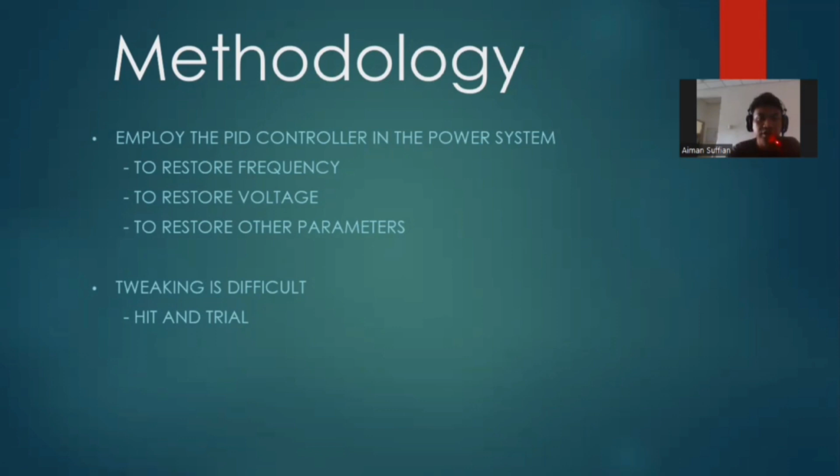So we use the MATLAB Simulink model because the recent version of the MATLAB software has included the PID tuner, which only requires that we input the response of any Simulink model, and it will instantly return results within a brief period of time.

So in order to create an open loop and closed loop system, we first need to add the second order transfer function to the model in the MATLAB Simulink software. For P, PI, and PID controllers, as well as the open loop model system, a different transfer function was applied for each model.

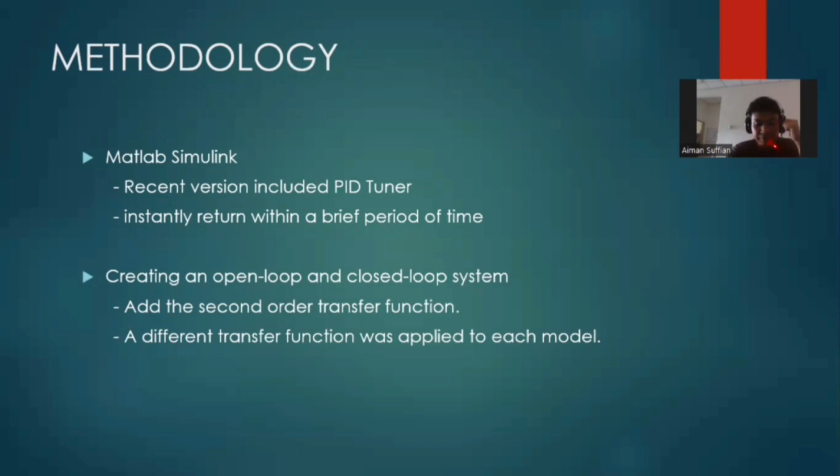Then we just open the dashboard to bring up the blank window which functions as a scope and displays the graph without opening the scope.

After we run the simulation, the graph displayed a significant overshoot and a very long settling period. Then we just need to tune it precisely using the PID tuner to eliminate the overshoot and achieve a brief settling period.

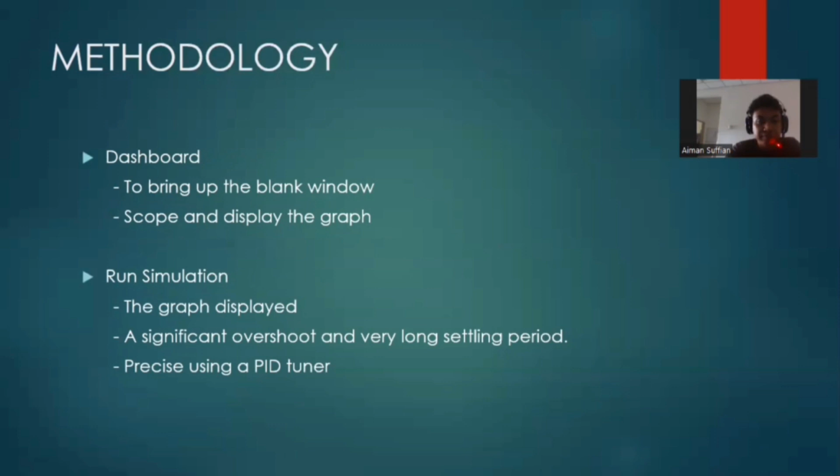To launch the PID tuner, we need to click the button on the PID controller block. The PID tuner will launch and transmit the graph there, instantly creating a tuned control response for the graph. The new parameter value is displayed in the controller parameters, showing several block and tune response parameters so that the results can be compared.

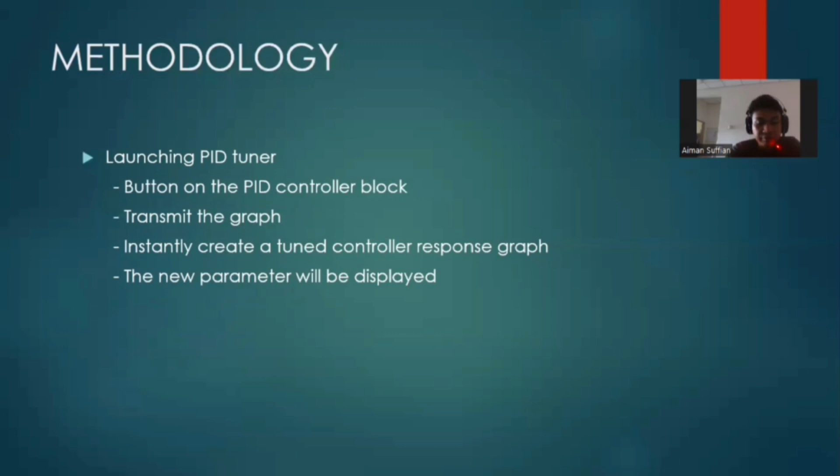So after the simulation, once the PID controller produces a satisfactory outcome, the next part is to design an open loop system using a different transfer function. The open loop system does not require the PID tuner because it serves as a direct transfer function, giving the user the desired graph right away.

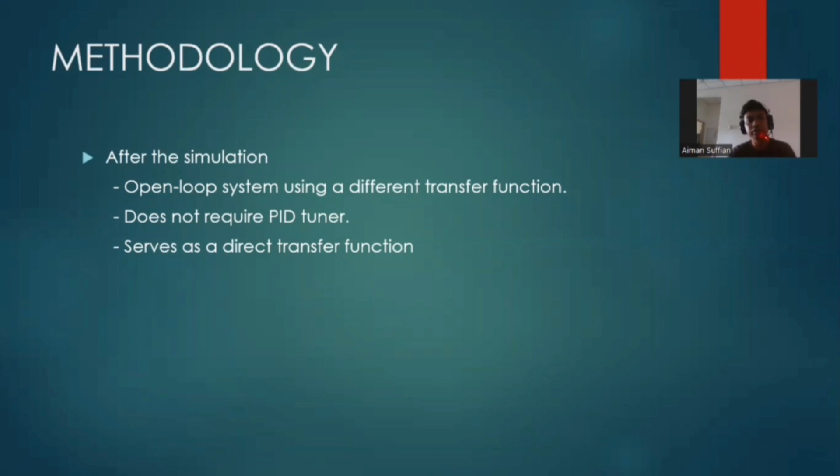Based on the instruction, we have to design a P, PI, and PID controller for a closed loop system with appropriate system requirements for transient response by tuning the controller using Simulink. A proportional integral derivative, or PID controller, is a control loop mechanism employing feedback that is widely used in industrial control systems and a variety of other applications requiring continuously modulated control.

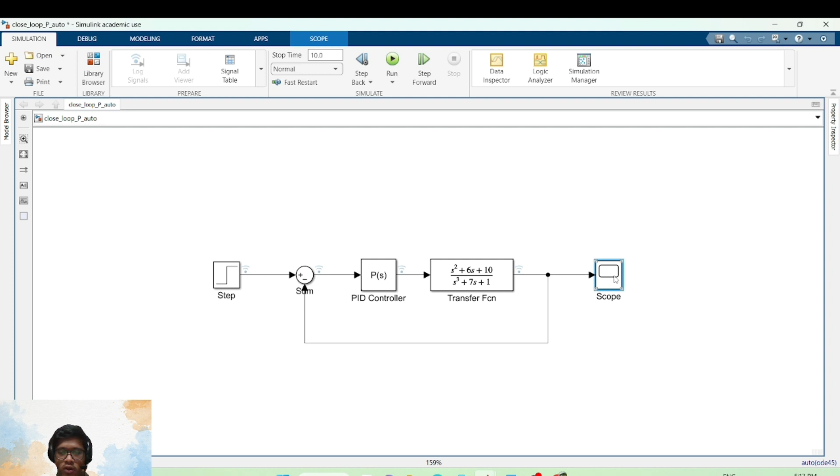So first of all, this is the circuit that we produced using Simulink. The components that we use are step, sum, PID controller, transfer function, and scope to produce a graph. This is the manual tuning simulation that we produced using MATLAB. So first of all, we have to run the simulation.

So the circuit has simulated. After that, we have to click scope to produce a graph.

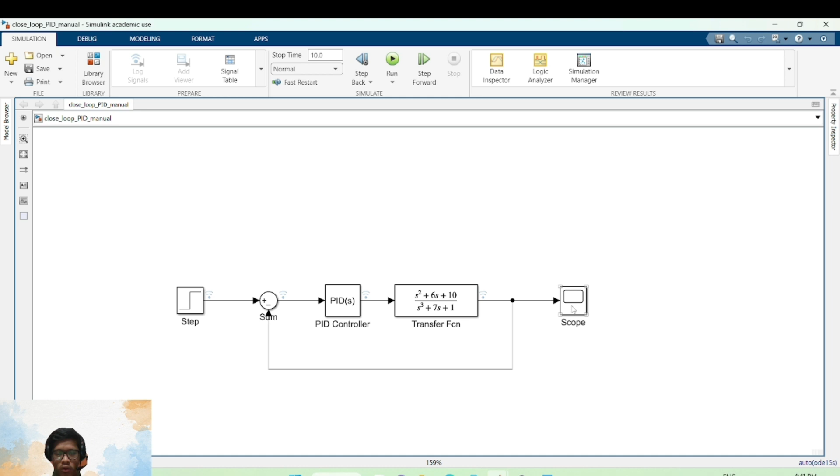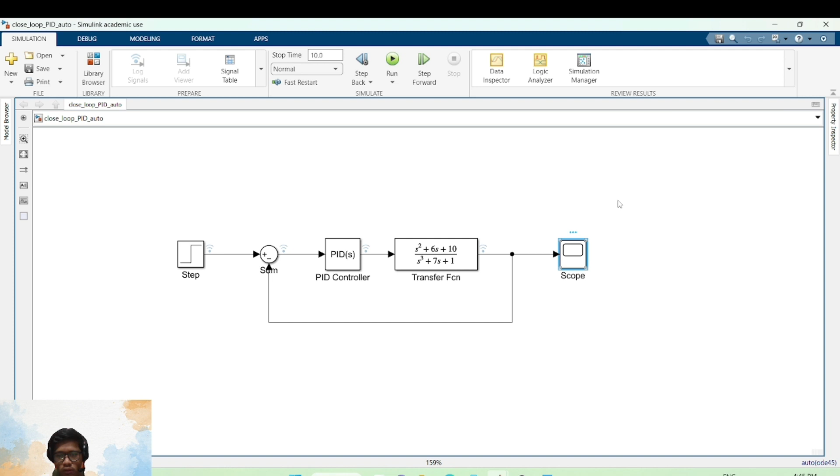And then for the auto tune, so this is the auto tune circuit. We have to run the simulation. Click scope. So this is the graph for the auto tune circuit.

Just the same as the previous procedure, you have to click the cursor measurement to find the value for rise time, overshoot and peak, on signal statistic and bilevel measurement. So you can see the value for the peak, rise time and overshoot.

So this is the result that we get for the auto tune: the rise time is 0.031006 second, and the settling time is 0.243 second, and the overshoot is 17.059%, and the peak is 1.168.

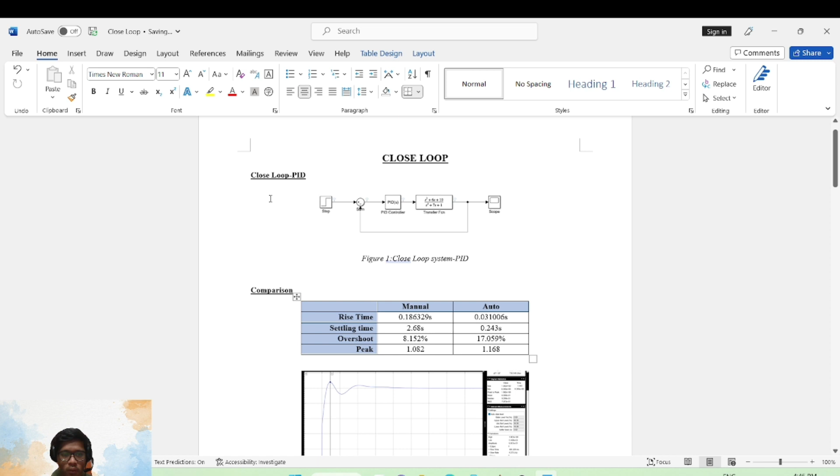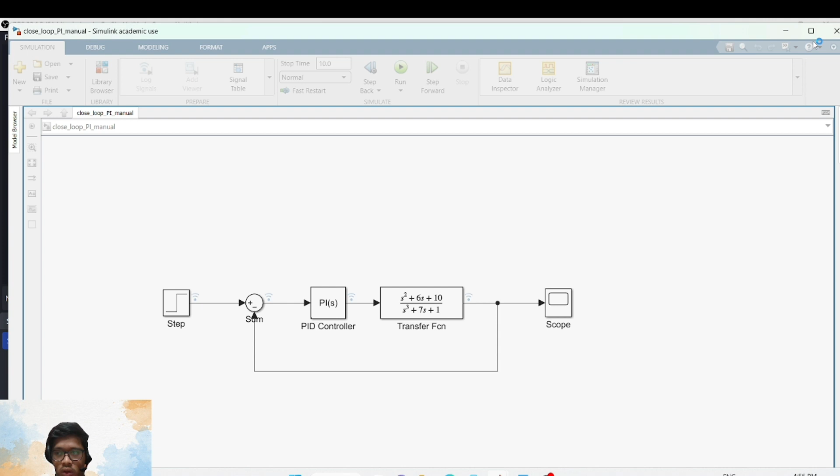So that's it for the closed loop PID. Next is closed loop PI manual tuning. So this is the closed loop PI manual tuning. First of all, we have to run the simulation. So the circuit has simulated, and then you have to click scope to find a graph.

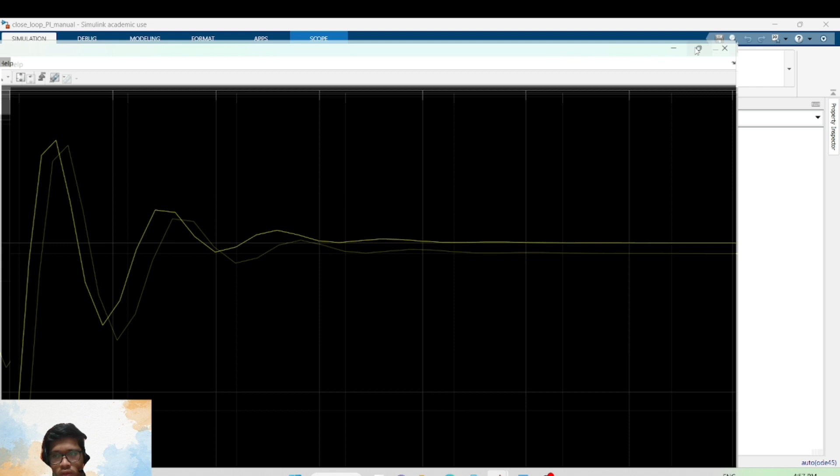So this is the graph for the manual tuning. And then you have to click the cursor measurement. So plot the cursor at the high value of the graph. So measurement, signal statistic, measurement, bilevel measurement.

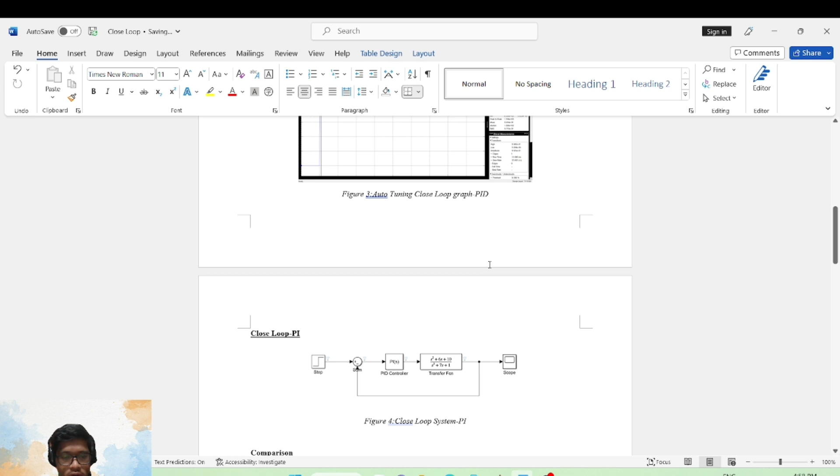So you can see the value for the peak, rise time, and overshoot. So this is the result that we get for the closed loop PI for the manual tuning. The rise time we get is 0.16112 second. The settle time is 2.87 second. For the overshoot is 34.459%, and for the peak is 1.346.

So the next is for the auto-tune. So this is the circuit for the auto-tune. Firstly you have to run the simulation. So the circuit has simulated. You have to click scope to find graph.

Click cursor. Measurement, signal statistic. So based on the graph, you can see the value for the peak, rise time, and overshoot.

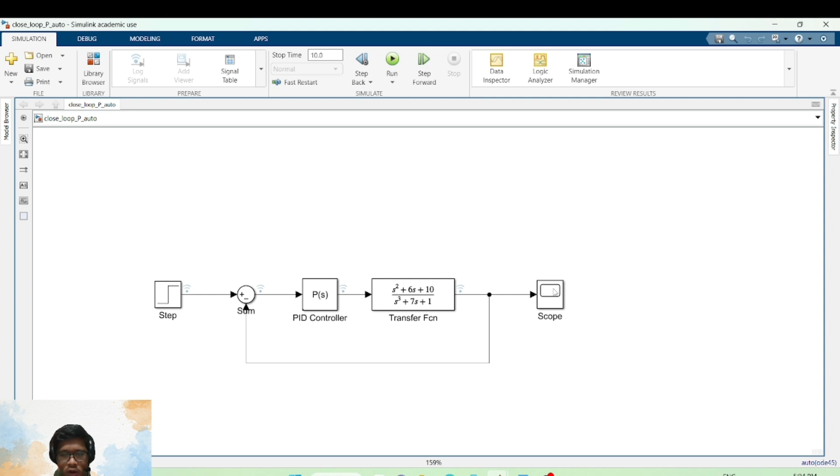So the next is auto tune. So this is the circuit for the P auto tune. You have to run the simulation. So the circuit simulates and then click scope. Cursor measurement.

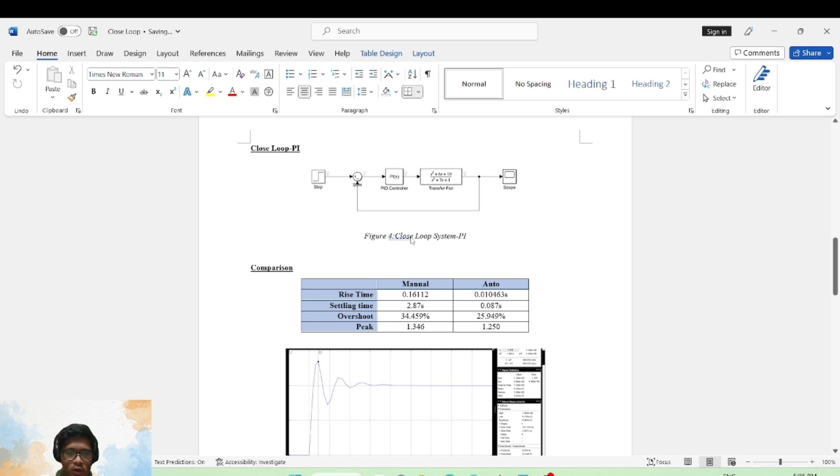So this is the value for the peak and the value for the rise time and the value for the overshoot. So the result that we get from the circuit for the P, for the closed loop P...

For the rise time on the manual tune is 0.173295 second, and for the settling time is 2.35 second, and for the overshoot is 25.945%, and for the peak is 1.241, and for the auto tune, the rise time is 0.112871 second. For the settling time is 1.23 second, for the overshoot is 21.341%, and for the peak is 1.200.

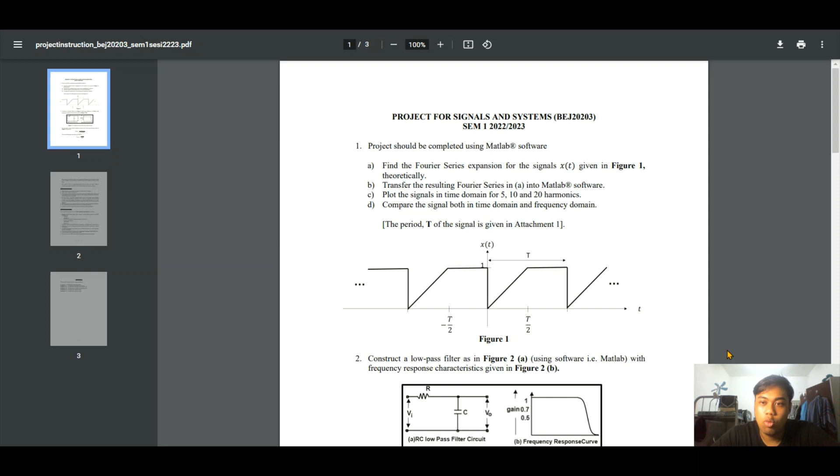Firstly, for question 1, we need to declare syms t n. Then we need to declare the frequency of our group, which is 140 kHz. Next, we need to declare the period, which is 1 over frequency, and declare the A0, which is 1 over 2.

Next, we have to declare the An, that we got 1 over pi squared times n squared times negative 1 to the power n minus 1. Furthermore, we need to declare the Bn, and the Bn we got negative 1 over pi n.

Lastly, we need to show the time interval, which is t equals 0 to 0.000001 to 20 exponent 10 minus 5. So we need to run, and we got the simulation.

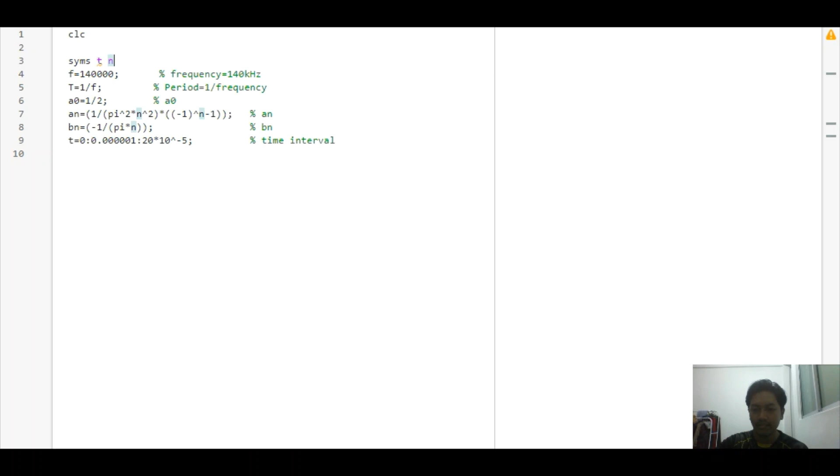Now for the harmonic plot. Firstly, we need to put the frequency, which is 140 kilohertz, and the period, which is 1 over frequency. We declare the A0, An, Bn, and time interval. Next, we need to declare the time domain for harmonic 5, and we got the simulation, the coding with the plot of t and xt1 and subplot of 3, 1 and 1.

Now for the time domain for harmonic 10. For the harmonic 10, we assume the value of R 100 ohm, and the value of C calculated manually in F, which is 2.842 exponent negative 9, and the impulse response of the low pass filter. Now we are using the Bode plot for the low pass filter. This is the coding for the harmonic 10.

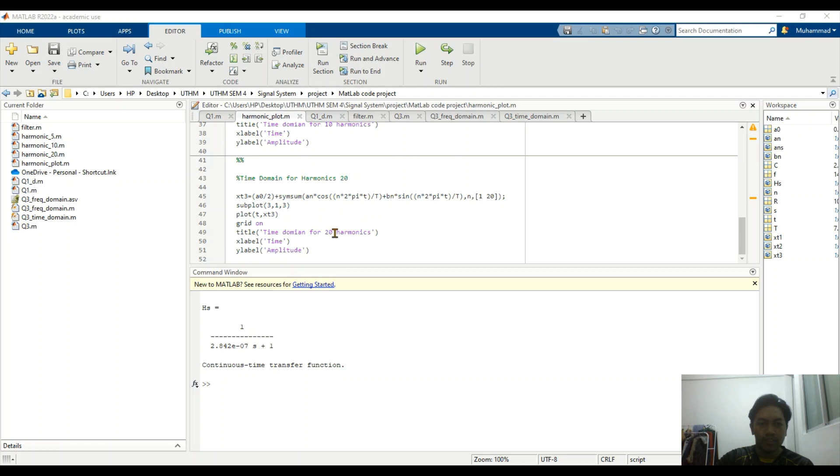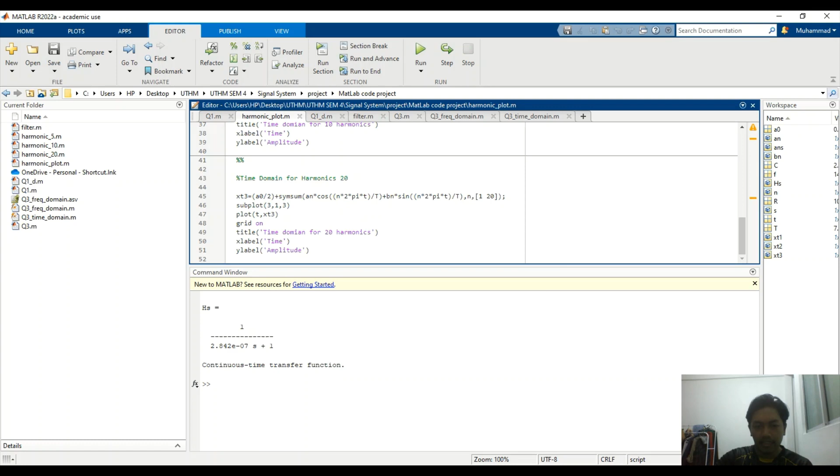As for the time domain for harmonic 20, we just do the same thing, just change the domain for 20 harmonics, and then we run. We got the H(s), which is 1 over 2.842 exponent negative 7 s plus 1, and this is the figure for the amplitude time domain for 5 harmonics, time domain for 10 harmonics, and time domain for 20 harmonics.

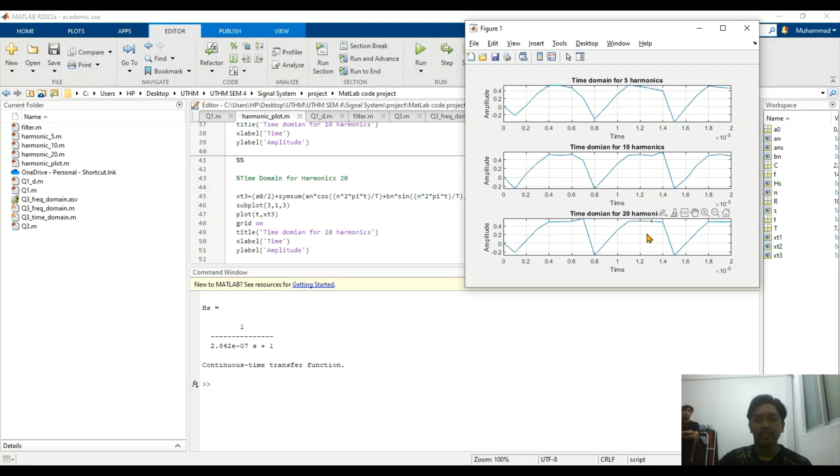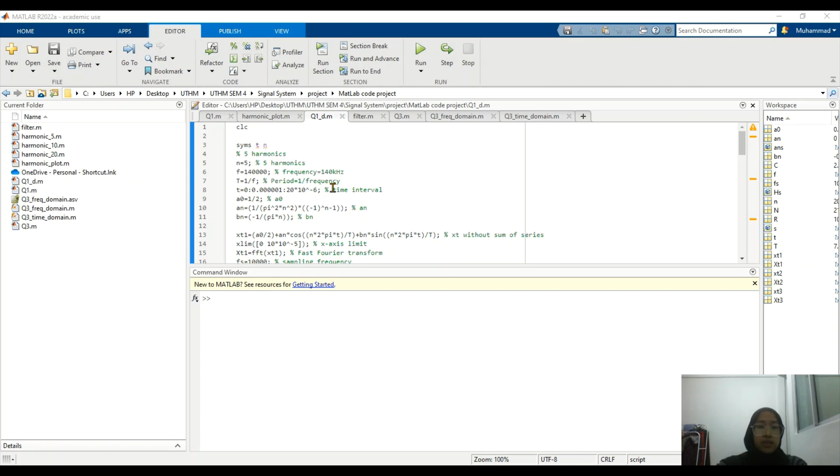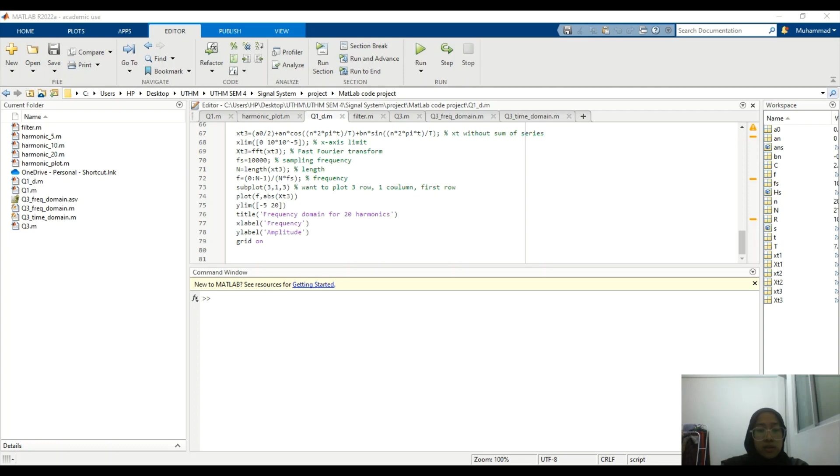Okay, my name is Nur Fasha binti Muhammad Rashid. I will present for the frequency domain. Okay, this is coding for 5 harmonics of a frequency domain. This is coding for frequency domain 10 harmonics, and this is frequency domain for 20 harmonics. This is our result. Thank you.

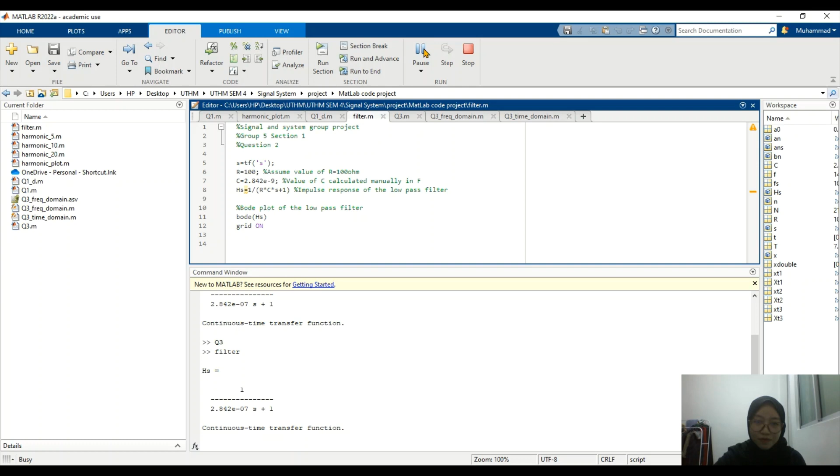Hi, Assalamualaikum. My name is Nadira Adiba binti Jusuf. So this is the coding for the filter from question 2. So we assume the value of R is equal to 100 ohm. Then we run the simulation. This is the result for the filter.

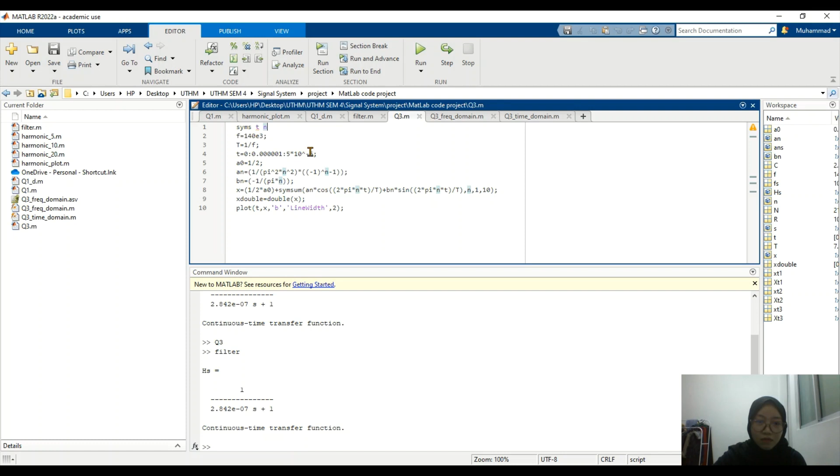Next, for question 3, this is the coding, in which our group frequency was 140 kilohertz. Then we run the simulation. This is the result for question 3. Thank you.

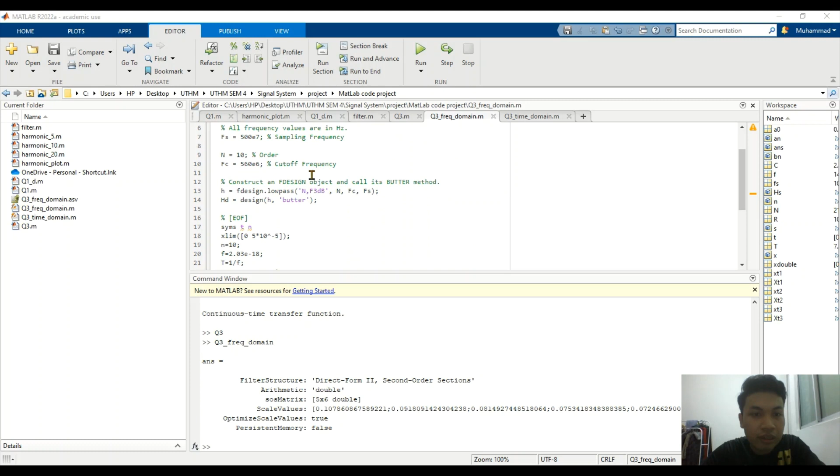Assalamualaikum warahmatullahi wabarakatuh. My name is Muhammad Aiman Muhammad Sufian, and this is question 3 for frequency domain. So this is the coding. Fs is equal to 500 exponent 7, n equals 10, Fc equals 560 exponent 6, and then this is the coding, and then we just click the simulation button, and this is the result. Thank you.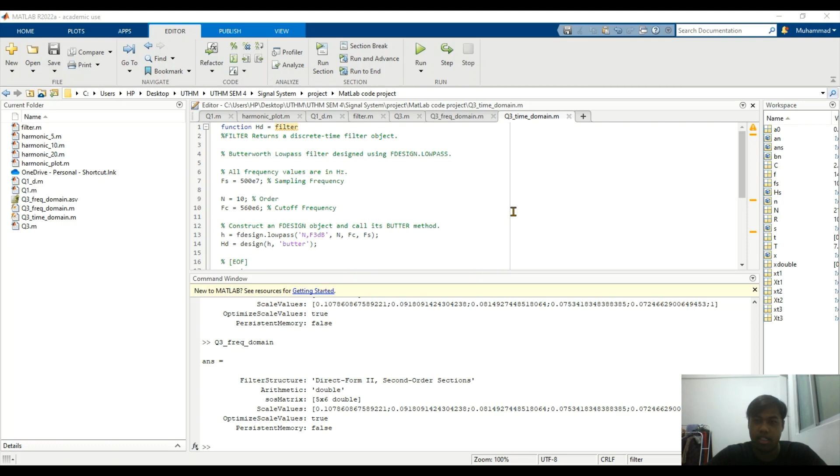Assalamualaikum warahmatullahi wabarakatuh. My name is Muhammad Darush bin Mutawaddin, and my matric number is DE 2036. So this is the coding for question 3 time domain. So we can see this is the filter returning a discrete-time filter object, Butterworth low pass filter designed using FDESIGN.LOWPASS, and all of the frequency values are in hertz, and this constructs an FDESIGN object and calls its BUTTER method, and this is the EOF. This is the coding. So let's run.

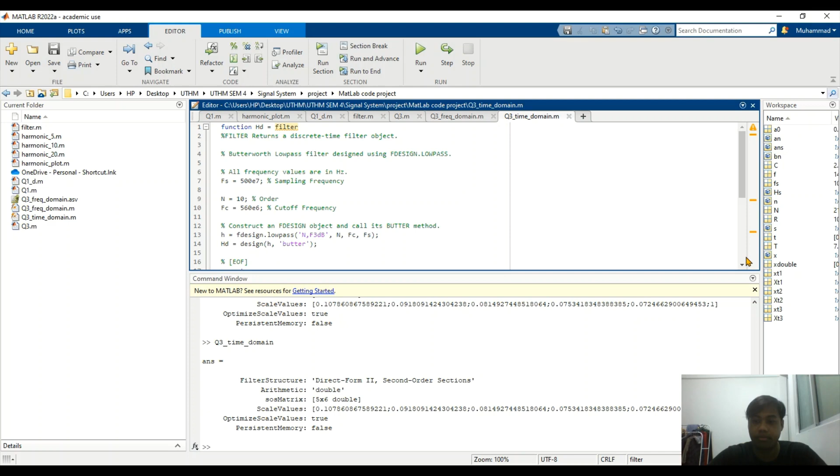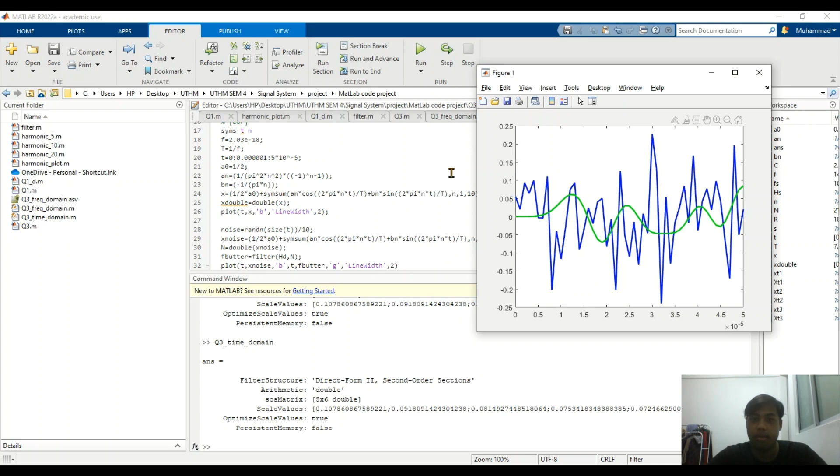Assalamualaikum. My name is Nur Fasha binti Muhammad Rashid. My matric number is CE21069. I will present the conclusion. The MATLAB Simulink software tool was used to model the system using step, sum, PID controller, transfer function, and scope blocks. Open loop control is simple and inexpensive, while closed loop control requires feeding back position information to a motion controller.

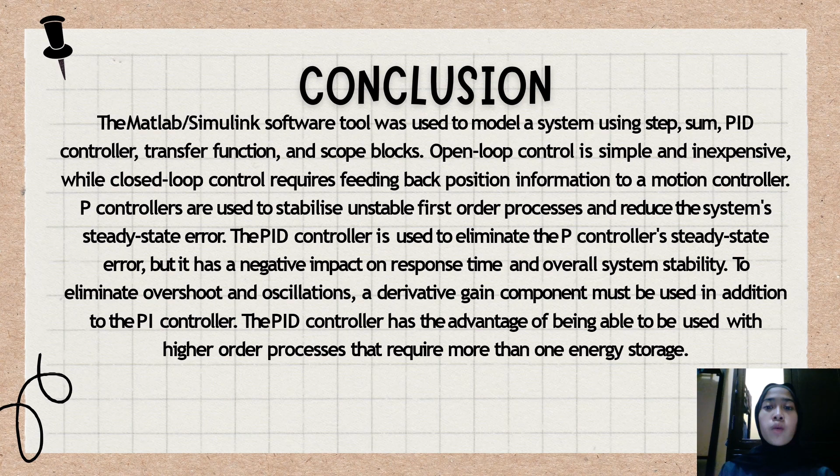P controllers are used to stabilize unstable first order processes and reduce the overall system steady state error. The PI controller is used to eliminate the P controller steady state error, but it has a negative impact on response time and overall system stability. To eliminate overshoot and oscillation, a derivative gain component must be used in addition to the PI controller. The PID controller has the advantage of being able to be used with higher order processes that require more than one energy storage.